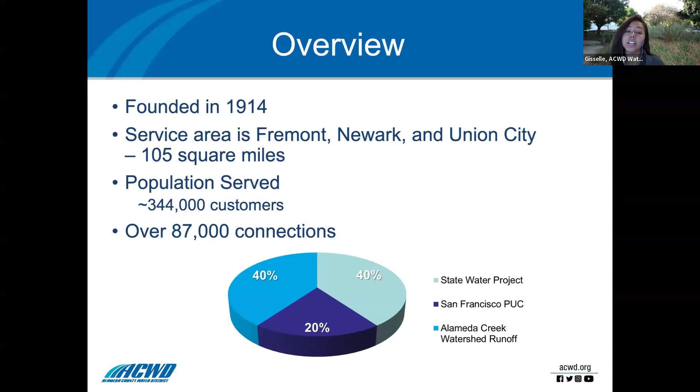So we offer a rain barrel rebate. It's $50 per rain barrel that you purchase and install in your home, up to a maximum of 2 rain barrels per customer. So you can receive a maximum rebate of $100 for installing 2 rain barrels. And you can apply for this if you go to our website, acwd.org/rebates. It is retroactive, so you would go ahead and purchase the rain barrel first, keep the receipts, send us the receipts and photos of the rain barrel installed, and then we'll go ahead and provide you the rebate.

Our website has some key requirements. The barrel must be at least 50 gallons, and some installation requirements. It can't be blocking pathways for safety. It has to be on a level foundation, etc. And you can review those on our website.

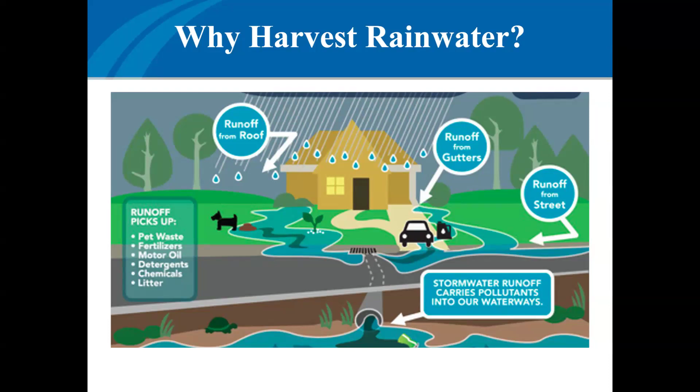Rainwater is great for your plants. It's great for your landscaping. It's great for your water bill. It's also great at reducing polluted runoff. There's a lot of pollutants that can end up in our water system and in our creeks, and they can affect our fish and our natural landscape and our natural ecosystem. So I kind of like to start there with how stormwater runs.

A lot of people don't realize that all of our stormwater, all the rain that comes down and hits our hardscape, our houses, our streets, and runs down into the gutters and down the sidewalks, goes into a storm drain. Those are the grates that you see in the side of the road. They often say, don't litter, no dumping, flows to bay, flows directly to the ocean, depending on where you are, flows to creek. And what that means is that water is not getting treated at all.

So as you can see in this picture, all of that runoff water is coming down into the storm drain, and that goes straight out into our waterways without being treated at all. The different type of treatment, which you can actually tour this plant later this month, which is really cool that Alameda County Water District is offering that as part of their Imagine a Day Without Water, is our sewer pipes actually go to a wastewater treatment plant.

So all of the water that we use within our house, our sinks, our toilets, our showers, that gets run into a sewer pipe, that gets treated. By the time that comes back out into the bay, that's been cleaned. So what we're going to talk about today is trying to reduce polluted runoff, which is not the water inside our house, it's the water outside of our house that goes into our landscape, but also runs down the streets, especially when we get those big flashes of storms.

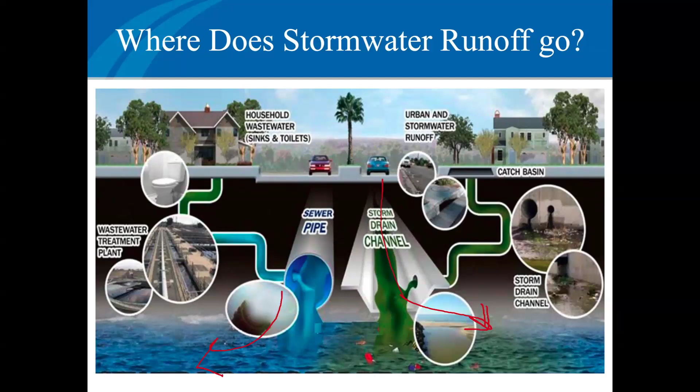So one of the ways that we can do this is a process called slow it, spread it, sink it. Slow it, spread it, sink it is a way to reduce the amount of water that's running off and thus reduce the amount of pollutants that water can carry. So if we can slow the water down, spread it out, and let it sink into the ground, it will help build up our water table. It will help keep the pollutants from running into the creeks and concentrating and harming our fish and wildlife.

So one of the ways that we can do this is rainwater harvesting, which is why we're here to learn about that today, as well as ways that it can help you in your own house. The big question that I get a lot is, well, I live in the Bay Area, is there really enough rain to make this worth my time and worth the effort of installing this new system in my landscaping? And the answer is absolutely. I wouldn't have a job otherwise. There is absolutely enough water.

A 1,000 square foot roof can capture over 600 gallons of rainwater from just 1 inch of rain. So I've got this great equation here. If you didn't get it written down, I'm going to have it on the next slide. Here's our equation, and let's take a look how that works in real life. So that means if our normal storm event, like we often get where it kind of sprinkles a little bit, rains a little bit and stops, is about a ½ inch. I'm not talking about those big 7-inch storms that we had last year, which were just a little crazy. But on average, we get these nice little ½ inch storms. So with a ½ inch storm, a 1,000 square foot roof could capture over 300 gallons.

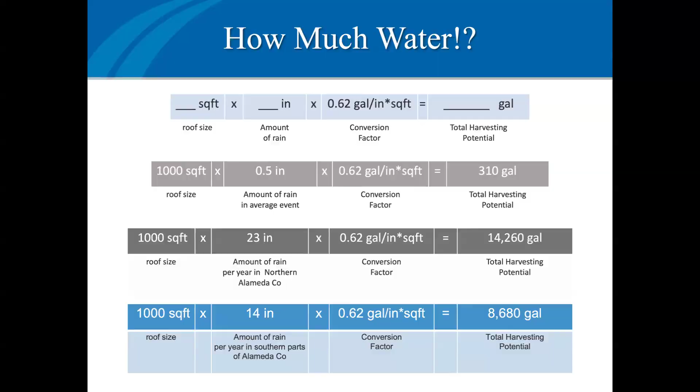Now, southern Alameda County gets a little bit less, about 14 inches a year. That's still over 8,000 gallons of water. So it is still a lot of water that can be harvested and stored and put to better use than running down our roads and into our storm drains. So it's significant.

Now, there's different types of roofs, and roofs will have different amounts that they can harvest. A lot of times with flat roofs, you may not have a gutter system, but you do have some downspouts, so you'll still be able to harvest some water, but you might not be able to catch 100% of the water that falls on that roof. You can harvest rainwater from most roof types that are used in the Bay Area.

And then you also don't want treated wood, cedar, or shake shingles. If you're treating them annually with an herbicide or a pesticide, the rain is going to collect some of that and concentrate it into a rainwater harvesting system. And we don't want to concentrate that because your plants will not thrive if they're being treated with an herbicide or a pesticide. So we want to make sure we're only using untreated wood, cedar, or shake shingles.

Solar panels are more and more common now, and a lot of people ask me if it's okay to harvest the rainwater off of them. It is. You want to check with your manufacturer and just make sure that they don't have any warnings about it, but most solar panels that are being installed today are completely safe. All of these other roof types listed here are safe to harvest from.

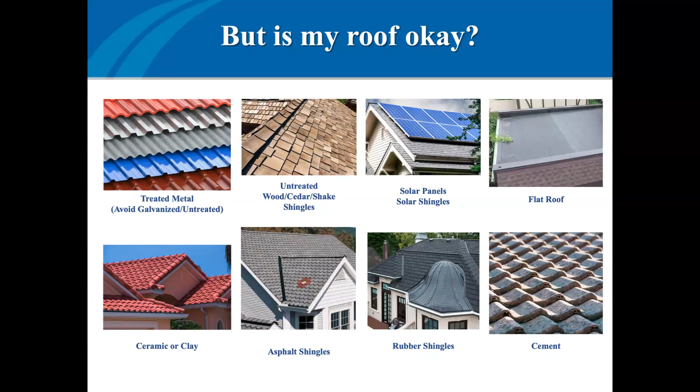So without any further ado, let's dive into talking about rain barrels, and we'll talk about rain gardens a little bit later. So rain barrels capture the roof runoff and store it for later use. It is a barrel. It is made to hold the water. It's going to eliminate or decrease your need for irrigating with municipal water.

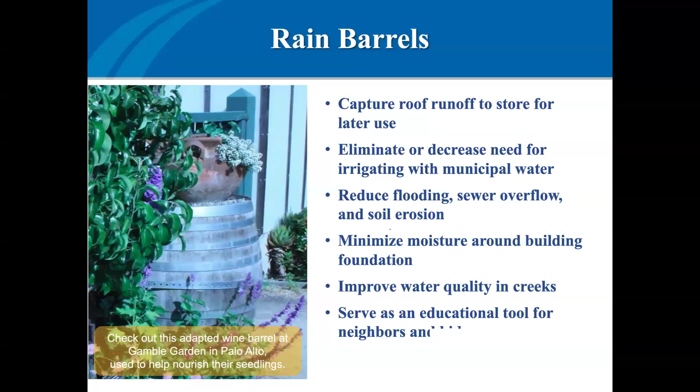It is going to help reduce flooding, sewer overflow, and soil erosion around your home, minimizing moisture around the building foundation. And as we already discussed, it can help improve the quality of the water in the creeks because there's less water running off and picking up pollutants as it flows into the creek. It serves as a great educational tool for your neighbors and your local community.

You do want to consider a few items when you're thinking about what type of system is going to be good for you. We're going to go through different types of systems and sizes and all of these different aspects of it. But what we're going to talk about is what your roof size is and your harvesting potential. So we've already looked at those equations and at calculating your harvesting potential.

A little later on, we're going to look at how to measure your roof as well. You want to think about the number of downspouts and how many you're going to be connecting into the system. You want to think about how much space you have.

And these points are all for a rain garden or a rain barrel, really. You want to think about that space. You want to think about that location. You want to think about the use of the water and where it's going to drain or overflow. And you want to think about aesthetics. How is this going to look next to your house? Where would you like to put the system that it's going to look nice and you're going to be happy when you see it every day?

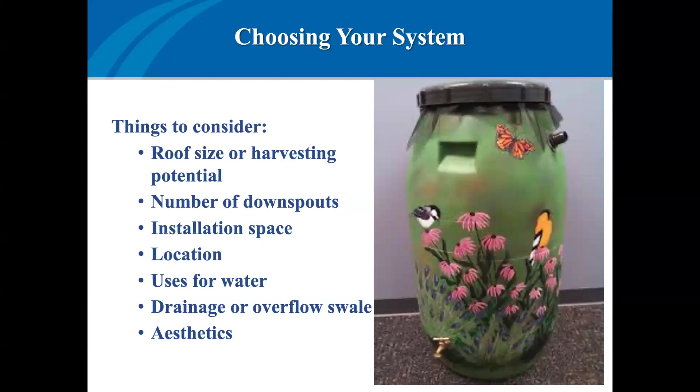So we do have a question that just came in. I'm going to actually take a quick minute to answer this. It says, how about reusing above ground standalone small swimming pools? Is it okay to reuse them to store rainwater for a few months with cover on it? That's a really great question because I don't want to forget to do that. It is actually not legal to use garbage cans or pools or other things for the rainwater harvesting. The reason for that is mostly vector control.

Not just vector control, but also UV control. Having the system so that you're not getting any UV light in them keeps any algae from growing on the inside and keeps your water stable for use. So we want to make sure that this water isn't creating or growing any bacteria. We want to make sure that it's not breeding mosquitoes. We want to make sure that we are keeping this water safe for use in our garden.

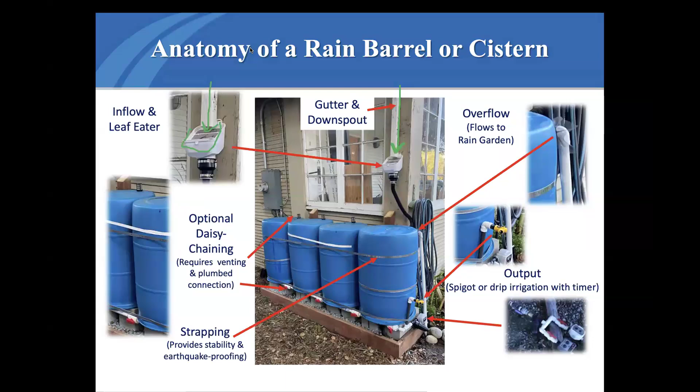Oops. Giselle, my screen just went yellow on me. Is it no longer sharing? Oh, we can see the slide, the anatomy slide. You don't see anything? Okay, well, we'll see if it... Maybe if you reshare. Yeah, I don't know. Is there a chance you paused me? Hmm.

Well, I'm gonna keep talking about anatomy because I wasn't ready to move on anyway, but I'm not sure if it's gonna let me continue. That's really odd. You stopped sharing and now it just has the, what do you see? Let's see. I'm seeing the anatomy of the rain barrel slide. Okay. Now it seems you stopped sharing. How about now? For me, it just says you started sharing and it's like a blank screen. Okay, I'm very sorry, folks. I'm not sure. Let me try this. There you go, it's back.

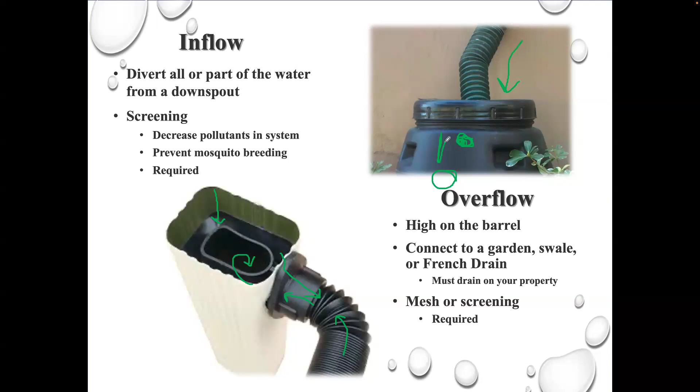So I've had people ask me to come look at their system. They didn't understand why it wasn't working, and their overflow was halfway up the tank. And they said, well, I never get water in the top half of the tank. And this is why: water is not going to go above the overflow. So you want to put your overflow as high as possible. You want to make sure you're connecting it on your own property to a garden, a swale, a French drain, something where it's going to go back into the ground.

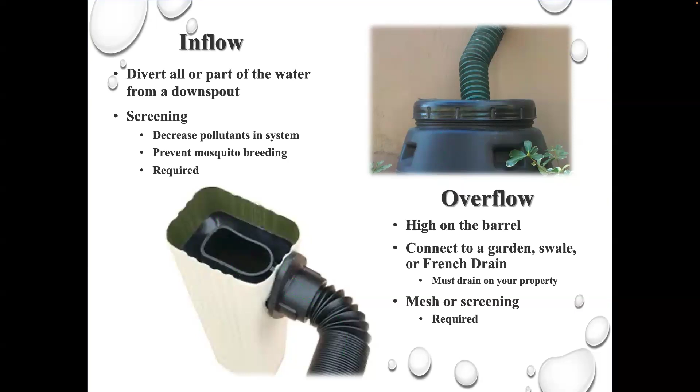If you do want to add a pump, it again gets you into the gray area where we're going to talk about permits. If you hardwire a pump in, so it is always connected to electricity, it comes on demand, and it's always wired in, that's in permit territory. But if you have a pump with a quick connect, or you can screw it into the hose fitting on your system, plug it in, use it, unplug it, disconnect it from your system, put it back in your garage, that's fine. That's completely legal. You don't need a permit. You're just using it as needed.

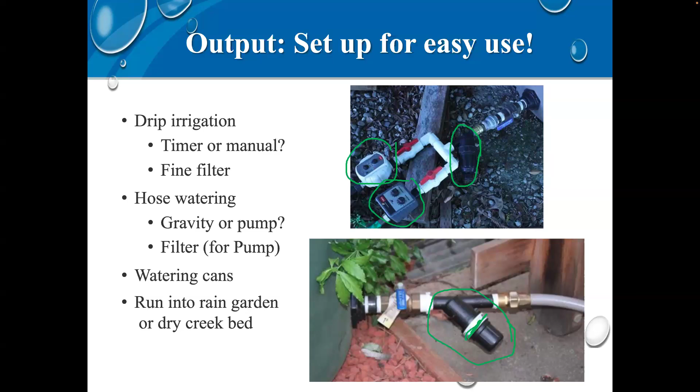It's great to use that water as regularly as possible. As we get into the rainy season, things will dry out a little bit in between storms. That's a great time to sink that water into the groundwater, to increase groundwater storage and to help maintain moisture in the soil, so that during the next rain, that soil won't have that hydrophobia, won't have that shock, and it will be able to absorb that water immediately.

It is wonderful to be able to connect this to a rain garden. It's great for washing tools and using for stuff. This is not potable water. We're not going to be drinking this water. We are using this just for landscape needs. And as we already discussed, you cannot connect this to an existing drip system without a permit. So you're only going to be installing a new drip system with this. So we already covered that. Thank you guys for the great questions.

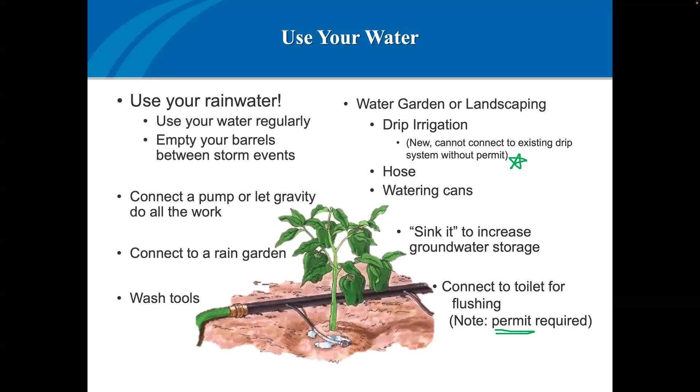The other question I get often is, is it possible to connect this water to a toilet for flushing? Yes, but again, you're getting into that permit area. So let's talk a little bit more about what gets you into that permit area and how we can avoid needing to get a permit and be able to just install this and get the rebate and have a wonderful rainwater harvesting system on our house.

So you do not need a permit if you're plumbing it fully exterior to a single family home. So fully exterior, we're not connecting it to anything inside the house. We're not connecting it to toilets, laundry, anything. It is fully exterior. It is connecting to a downspout and to a garden. And if it's under 360 gallons, you can water however you want. You can use a hose, you can use a watering can, you can use buckets.

If you go over 360 gallons and you have drip irrigation and you are not connected to electrical and you are not connected to a makeup water supply, you can go all the way up to 4,999 gallons without needing a permit. So that is a massive amount of water, a massive system. I can't imagine any of you guys getting that big of a system. But the number to really remember is 360 gallons. And if you go a little bit over that, then you're going to just use drip irrigation. If you stay under 360 gallons, you can water however you want to water your garden, use it for your plants.

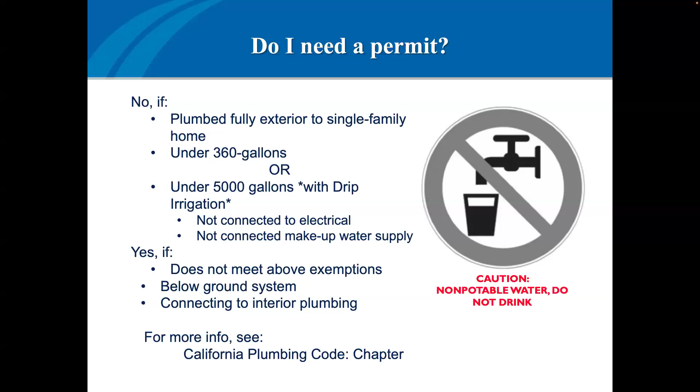Maintenance is pretty straightforward and very easy for rain barrels. The really big thing is keeping those screens clean. You do need to clean your gutters twice a year. This is really good practice anyway. I found our neighbor had a really crazy dropping tree that came over one part of our house, so we actually had to clean it pretty much every storm or our gutters would overflow.

But if you don't have any big trees, the minimum requirement by the state of California is twice a year. You want to check and empty your leaf eater or your screens 4 times a year. So you will have screens, even if you don't have a leaf eater, you're always going to have a screen anywhere it's opening up. So if you're connected to your drip irrigation, there's going to be a screen. That's your filter. Your overflow is going to have a screen. Your inflow is going to have a screen. So those are done 4 times a year.

If you have a first flush diverter, which we didn't really talk about, they're really useful if you're in a very high dirt area, high dust area. You need to clean those twice a year, minimally. State of California requires, and I quote, that you visually inspect valves and components once a year. I find this a little bit funny because if you are installing this on your own house, I sure hope you're walking by it more than once a year and you're looking at it and going, wow, that looks like it's working great. But the state of California says visually inspect it once a year.

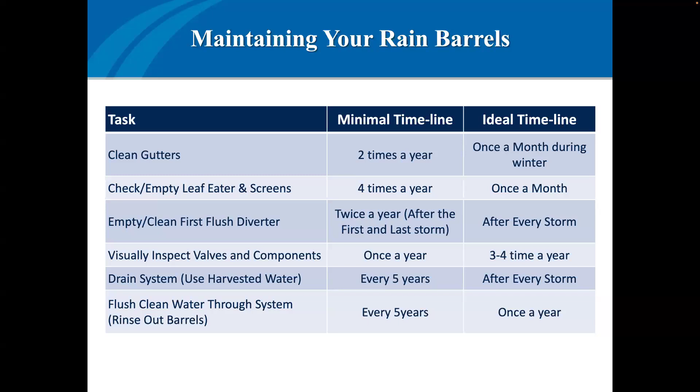I've been using a lot of words like systems, barrel systems. And I have a question here that's a great question. It says, I have 5 downspouts. Hypothetically, if I add rain barrels to each of those, do they count as one system or 5 different systems? And that is a great question, because the answer is, well, it depends on how you do it.

If you have 5 downspouts and you also daisy chain those 5 barrels together, so the water's running in from 5 downspouts into each barrel individually, but you have connected the irrigation lines to all 5 barrels, or you have daisy chained all 5 barrels together somehow, if the water commingles, it counts as one system. If you have 5 separate barrels and each one of them is being used for something different, they're not connected or plumbed together in any way, those are 5 separate systems.

For the rebates, as Giselle mentioned, you can only get rebates on 2 of those. But you can do more, obviously, and they are all 5 separate systems. So if you want to put 300 gallons on all 4 corners of your house and you don't connect them, then those are each 300-gallon systems. Those are not a 1,200-gallon system, as long as you aren't running any plumbing between them.

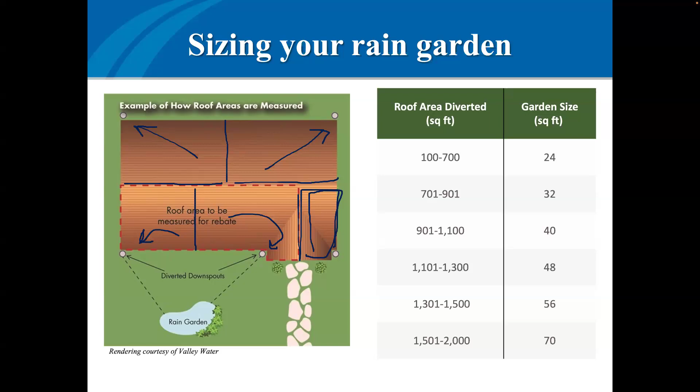So each downspout would get its own separate measurement to calculate in that original equation we looked at for the amount of rainfall and the harvesting potential. So hopefully that makes sense. I've got some plant recommendations, and we'll talk about plants and garden maintenance, and then we will open it up for Q&A.

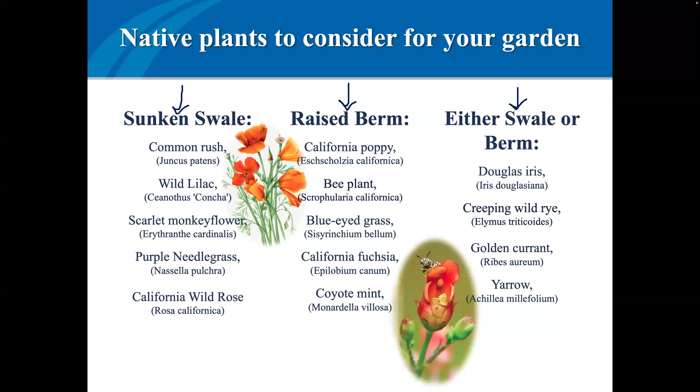These are some native plants that I like to use in rain gardens. You do want to consider which plants are okay being kind of drowned a little bit during the rains and then drying up and being dry in the non-season. You want to consider which plants really don't like having their feet soaked and would rather be a little bit higher up. And then some plants are kind of okay either way. So these are just a small selection. BAWSCA has a really wonderful Excel spreadsheet that you can go to and you can sort by rain garden, and they list all the plants that they recommend and that they endorse for their rebates.

A big question I often get is, can I irrigate edible plants with my rain barrels, or can I put them in my rain garden? So because our rain barrels do concentrate everything that hits our roofs, and we live in the Bay Area, we get a lot of forest fires, we get a lot of smoke from fires. The one that I like to use as an example is in 2020, we had a couple days where the sky was just orange and we all came out of our houses and there was ash everywhere on our cars. And there's a lot of chemicals in that ash. So we really don't want to be concentrating that into our rain barrels and into our food. So if we do have a lot of ash, you can disconnect your rain barrel.

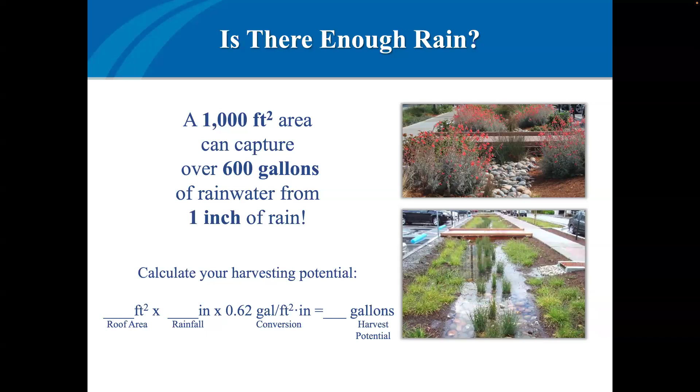We have a question here. Any resources for examples on various ways to add rain barrels? I have a couple of downspouts which are not immediately conducive due to their locations. Using that partial diverter, you can run a line around a corner, you can run a flexi hose away from the barrels. I would recommend taking a look at that Blue Barrel Systems website. I think I have it on this last slide. If not, it'll be in the email. I don't have it on this last slide.

Greywateraction.org has some really great resources as well. And Flows to Bay has really wonderful resources. So these are all great websites to look at for resources for the Bay Area and examples of systems that have been installed. My address will also be in the follow-up email. So if you do want to send me a couple pictures, I can take a quick look and just type back what I see as possible options, just to help you get started with the process.

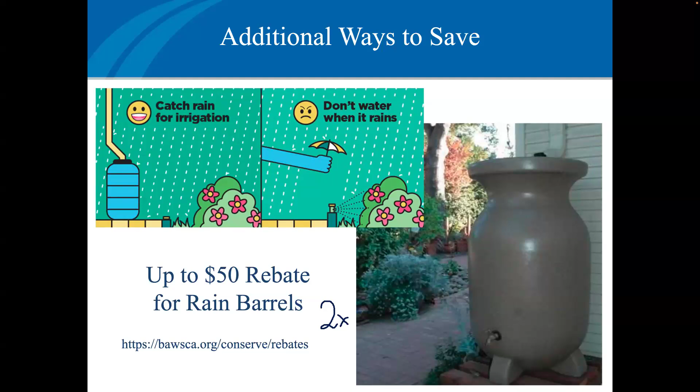And that actually leads into one other question that I often get that I didn't get tonight and didn't think to answer: how much do these cost? When you get into cisterns, they're a lot more expensive. You're generally looking at least $2 per gallon as you get into those bigger systems. But if you're looking at the blue barrel system, these tanks are usually about $30 and the kits are about $25 to install them. So if you're just getting one 55-gallon blue barrel tank and the system, you're looking at $50 to $60.

So that rebate can actually sometimes cover the full cost or very near to that full cost, which is really incredible. If, however, you want to get something like the rain station, they used to be $50. They've gone up. They are currently closer to the $100 range. And then the other basic kits, the prices really vary, but the rebate can fully cover a recycled system like the blue barrels.

We have a great question here. Are there any additional grants or funding programs available for rainwater collection in the Bay Area that I could apply for aside from the rebates mentioned? At this point in time, the only programs I know of are specific to East Palo Alto. Giselle, I don't know of any in Alameda County. No, I can't think of any in Alameda County.

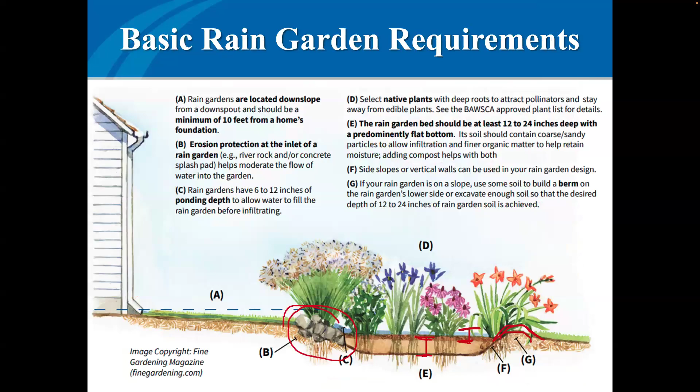If you keep an eye on those websites, they may or may not show up with these reduced priced barrels. I think last year they did it in November.